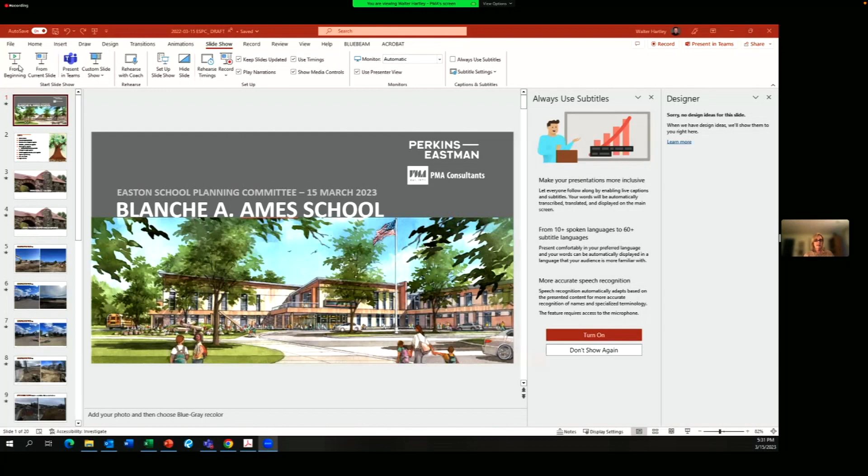Good evening. First item on the agenda are the minutes of February 15th, 2023. Does anyone have any questions or comments? I can't see everyone, so just call out if you have anything. Billy Silbright, I was not in attendance at the last meeting. Okay, thank you, Billy. Anyone have any comments or questions?

Okay, then I'll take a motion to approve the minutes of February 15th, 2023. So moved, Fulgenetti. Second? Okay, roll call vote. O'Neill? Yes. Cabral? Yes. Weintraub? Yes. Cedarbaum? Yes. Fulgenetti? Yes. Helen? Yes. Is Tim Vamosa here? I can't see you. No. Ken Carlson here? I am. Okay, Carlson? Yes. Billy, do you want to vote on these? Abstain. Okay, and Wiseman, yes.

Thank you. So the next item, construction progress update. Walter? Good evening. Can everyone, Jackie, can you see the screen share? Yes. Yes, thank you. Perfect.

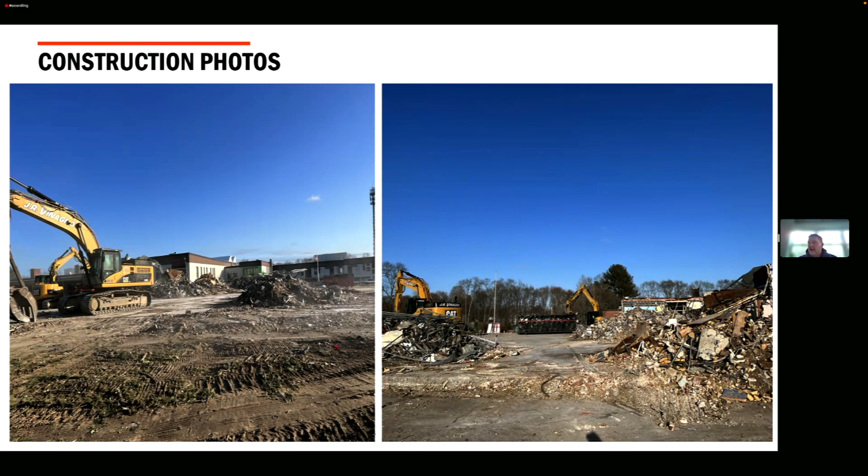All right, so we'll run through some pictures of what's been going on over the last month. If anyone has driven by the site, you'll notice that the building is gone, but here are some photos of the building at Old Parkview in progress of being demolished. All of the abatement was completed first. Clearances were received on the first half of the building in early February, and then later in February, the second half of the building. So they worked east to west. Here's some pictures on the left, loading out the remaining steel and remaining scrap, and then over on the right, just the asphalt remaining from the parking and play area that was on the western side of Parkview.

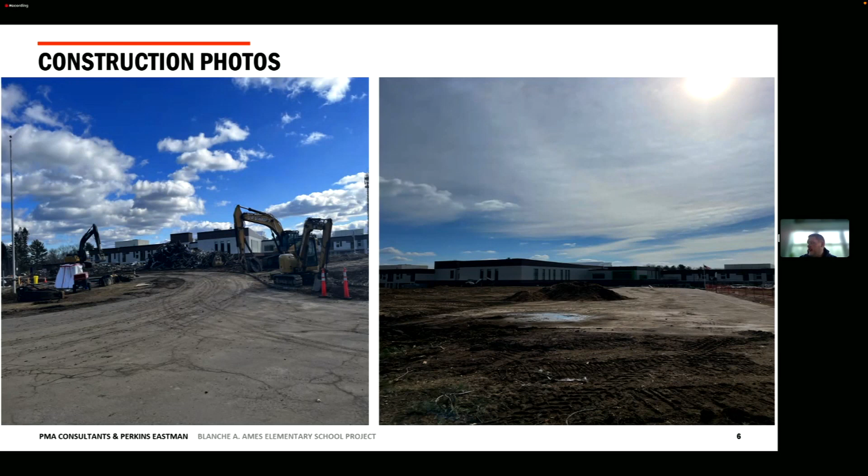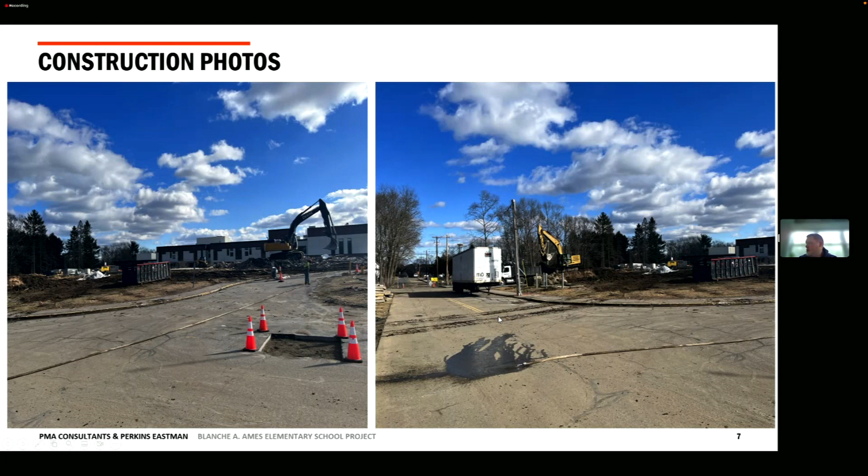You can see some more demolition activities, and the water line in there that they were using to keep the dust down. So that was great. The filter swaps were going on at the RTUs once a week at the new building. So that was great as well. And then over here, you see some of the site work being cleaned up over on the Bankston Street paper road on the left, and then another view of that area on the right.

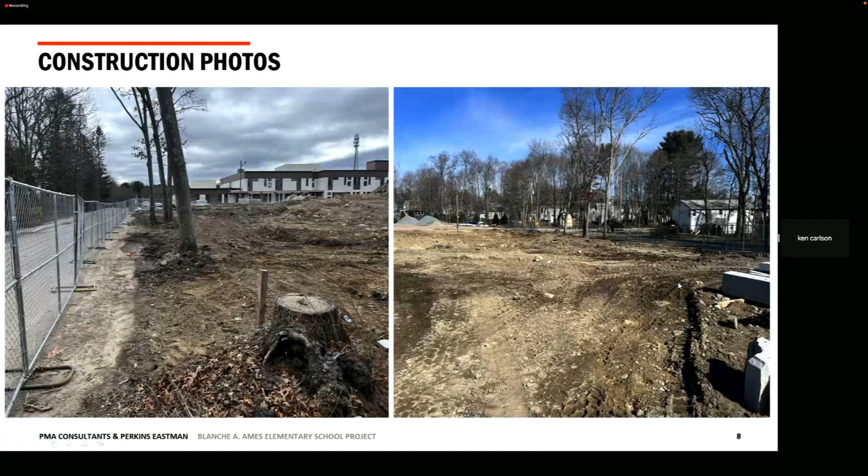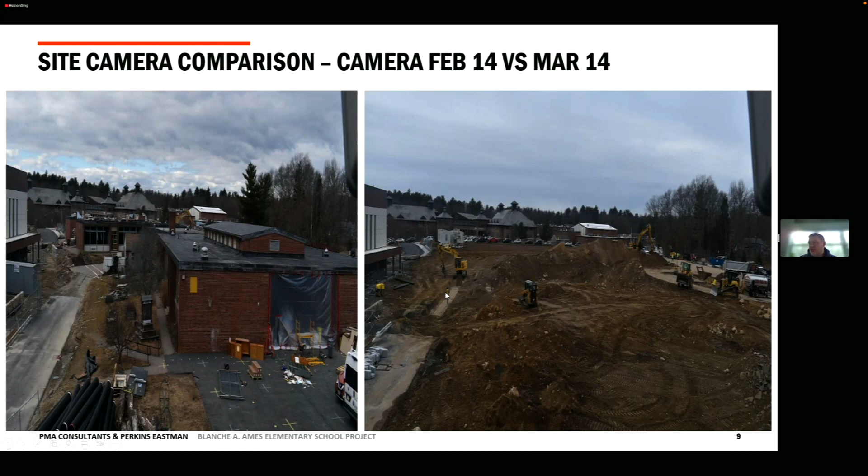Signage, some exterior signage is ongoing at the building. That's looking to wrap up, if not prior to April vacation, during April vacation. And then just the remainder of the punch list, we received an update today from Brate Builders that they were around, and what they believe is about 240 to 250 items left on their punch list.

They're working on those as they move through, but they're also attacking some of the larger items during the April vacation. That's why it won't be complete before April, because some items aren't very invasive, but some are. They really can't be done overnight; they need a couple of days to attack them. So they'll be in there during the April vacation.

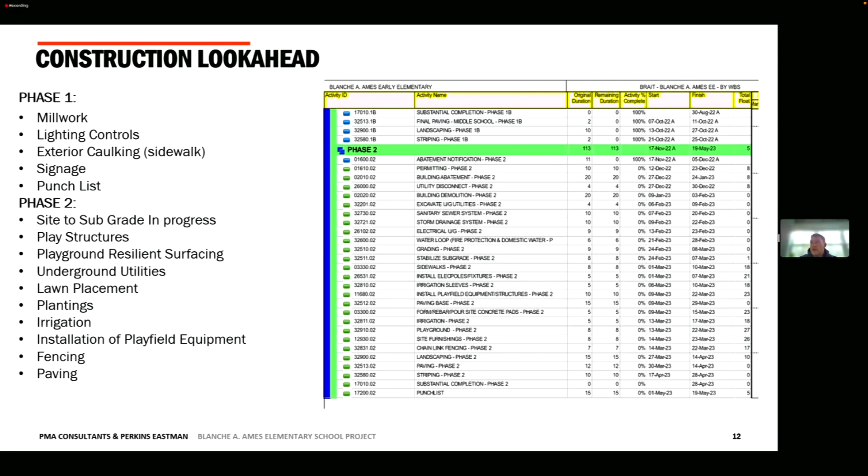Soft cost contingency is still sitting right where we were before. That exposure is just the couple of remaining buyouts for items approved by the technical review committee that just need final authorization from the select board. Those will be going, I believe, on March 27th at their meeting. And then bid savings remain where we were at that point in time.

So very good right now—about half, a little more than half, of the contingency has been expended or is accounted for. 5.1% of the project time is left, and we have about 46% of the contingency available. So we're in great shape as we head to the finish line here.

No discretionary PCOs at this point in time for the review of the SPC. And then a quick FF&E and IT budget update.

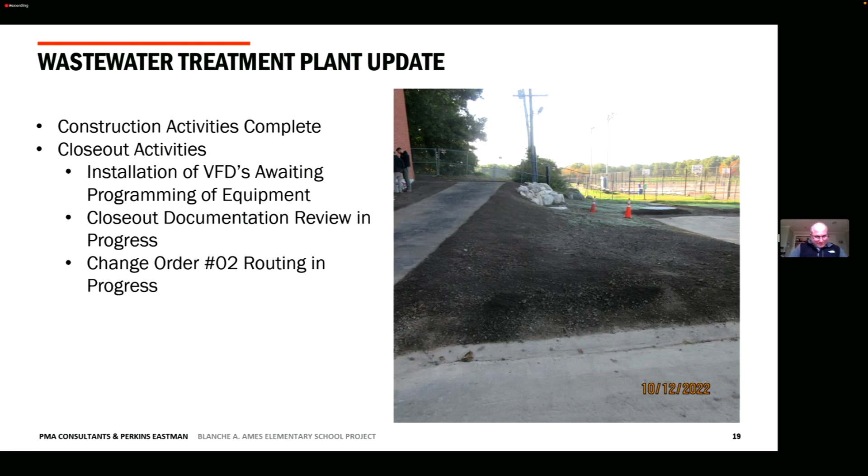Sorry, I know I ran through that quick, but we do have our next two meetings tentative or scheduled. April 19th, that'll be 9 days before phase 2 substantial completion, so we'll have a very clear picture of where we're at for this committee at that point in time. And if anything comes up in the meantime, we'll be sure to reach out.

We will have a meeting on May 17th. Very likely we'll have very little business at that point in time to go over. But we want everyone to be aware that we are tracking that date - we haven't had that on the meeting minutes yet, so we're just tracking it for the third week in May, May 17th. And we got the year right this time.

Walter, it's Dawn - April 19th, that's school vacation week, I think? Yeah, it is. Okay, just so folks know, from the town and schools may be away. Yep, hopefully we can take a break.

Certainly, if we need to adjust that date, let us know. If you want to discuss that here, Jackie, let us know - we can adjust the date if need be. If anyone thinks that's going to be a problem going forward, just email me and we can discuss an alternative date. As long as we can make a quorum for that meeting, we might as well keep it to keep everything on schedule, but just let me know. How many people do we need for a quorum? 7. Okay.